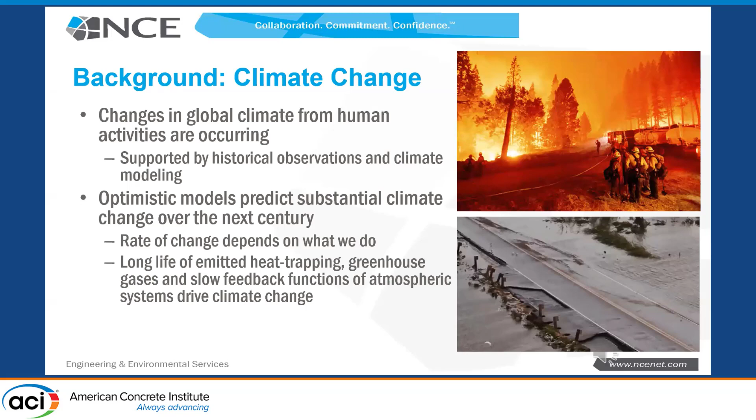Optimistic models predict substantial change over the next 80 years, and a lot of people focus on 2100 and the changes that will occur by then. You're probably aware that most associations and industries are embracing a goal: net zero by 2050. So the goal is to try to get this under control over the next 30 years, which is not a lot of time.

Predictions are that if today we somehow went net zero, we would actually mitigate this effect pretty quickly, and we would see it happening. If we track optimistically, you're going to see that kind of middle SSP 2 to 4.5 scenario. And if we just keep doing what we're doing, we're looking at a 4 to 5 degree increase in average temperatures annually in the world.

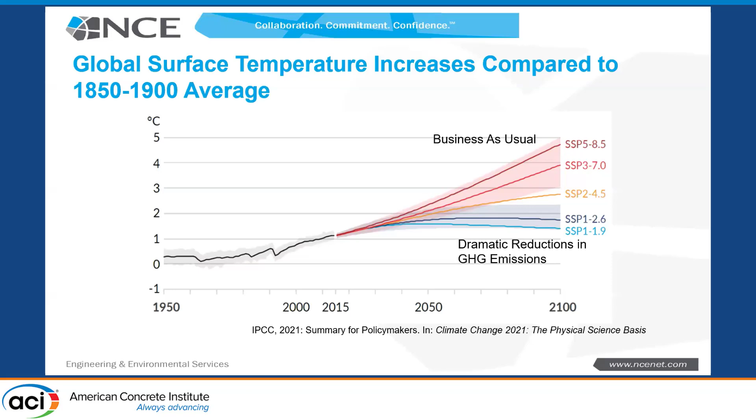This is significant. I live in the Upper Peninsula of Michigan - we're hoping for a little global warming up there, it was 10 degrees yesterday and snowing. But for the rest of you, especially Florida, where if the sea level goes up 3 feet, basically Orlando is almost becoming beachfront - and that's not a joke, that's actually true. It's going to be a serious problem.

This is why we're doing this - it's actually serious, and as an industry, as an association, we are embracing this. We talk about sustainability in general. I'm not going to have a lot of time to go through it, but the reason I put this up is I'm going to be focused on our concrete materials today. That's a small little piece of the puzzle.

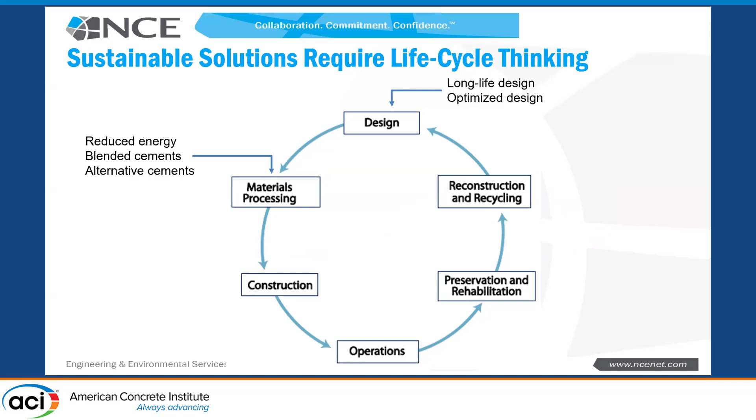We need to adopt life cycle thinking. We need to be thinking from the design phase, looking at optimized design, long life designs, how we're looking at our material processing - that's where I'll focus today - our construction process, efficiency, possibly calcium carbonate mineralization, and operations from a highway perspective, which is huge.

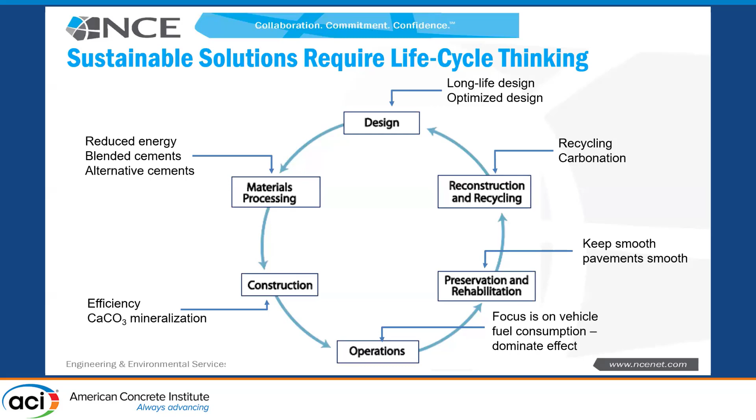Airports, not as much, but we definitely will want to think about how we're going to preserve things, keep them functional, deal with resiliency, and then in the end, the recycling of that material and then running it back through our new designs. So all of this is important.

The challenges in front of us, they're pretty great. And I will tell you, change is difficult, right, Tyler? People don't like to change, unless you're Tyler. Tyler likes to change every day, man. He's got energy. He embraces change.

But most people freak out about change. We have to start to embrace it a bit, understand this change is coming, educate ourselves, and look at what we've done traditionally. Our traditional cement and concrete are carbon intensive, and what we can do to fight the conservatism built within our current codes, specs, and standards that prohibit us from making the change we need to.

And I will tell you, we've made some good changes. I'm going to talk about things now, but the idea here is don't be sad. There's a lot of opportunity here to innovate, and we have a lot of help from people interested in helping us as a species change our behavior.

So why the focus on cement and concrete? I'm sure most of you have seen this. The reality is, for every man, woman, and child on this planet, we produce about 2.2 cubic yards of concrete per year. We love concrete. It's a wonderful material. Civilization as we know it is built with concrete, and that's not an exaggeration. You wouldn't have running water, you wouldn't know where it goes when you flush the toilet, buildings, everything.

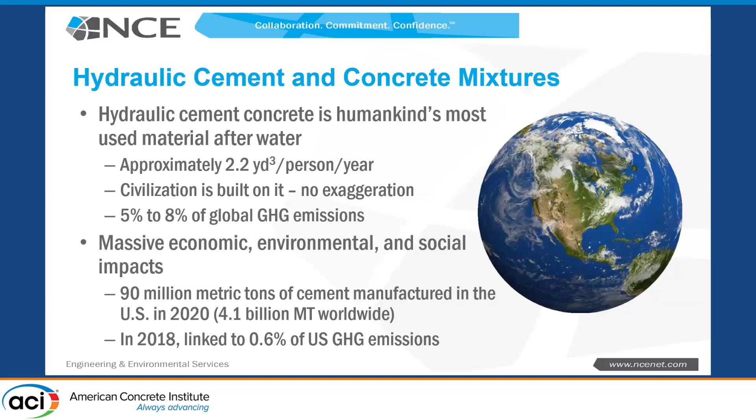Concrete's wonderful. But because it's used so much, and it's so robust and easy to use and forgiving, it's roughly responsible for 5 to 8% of the CO2, the greenhouse gases we generate in the world. The numbers in the US are smaller as a percent of our economy. We roughly manufacture 90 million metric tons of cement in the US in 2020, versus 4.1 billion metric tons manufactured worldwide. That's about 0.6, 0.7% of US greenhouse gases. So it's a smaller percentage, but that doesn't mean it's not significant, and that we're not the focal point of those who want to lower our carbon footprint.

Where's it coming from? If I look at concrete in a ready-mix truck at the gate, leaving the ready-mix facility: 1.5% of the CO2 in that 10 cubic yards of concrete is basically from acquiring and processing the raw materials to make that concrete. 89% is from making the Portland cement. 9.5% is wrapped up in actually making the concrete, the aggregates and whatnot.

Out of that 89% from manufacturing, 37% of all the CO2 involved in that concrete in the truck is from the fuel burning in that kiln. If you haven't seen a cement kiln and you have the opportunity, take it. It's an amazing thing, it'll scare the bejeebers out of you. The heat is incredible, right? Around 2,700 degrees Fahrenheit, I think. So it's hot. That's probably where Jimmy Hoffa ended up, in cement clinker.

46%, almost half of the CO2 in that truck, is from taking limestone, calcium carbonate, calcining it, and driving off CO2 — the chemical reactions necessary to create Portland cement. That's really tough to get away from. No matter what efficiency we bring into our whole system, that truth stands. So the net result is for about every pound of cement, kilogram, or metric ton we make in the US, roughly 0.922 pounds, kilograms, or metric tons of CO2 is generated. A little bit less than one.

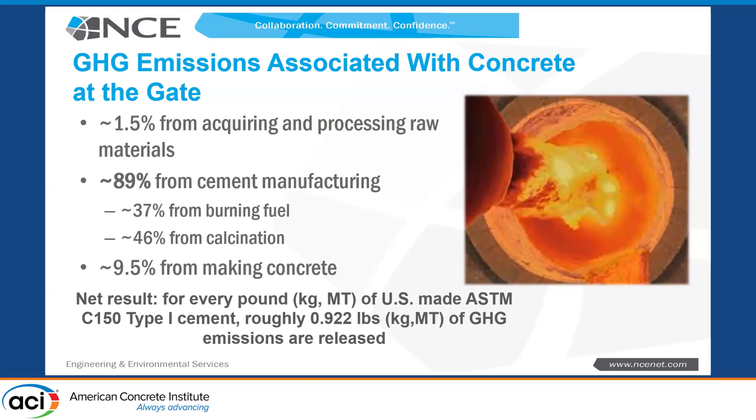When we look at typical concrete at the gate, the number is about 0.26 tons of CO2 per cubic yard. That's kind of an average number, it can be higher or lower. Roughly 0.23 tons of that is from the Portland cement in that concrete. So guess where the focal point is? If you're going to deal with this problem, what are you dealing with? Portland cement, right?

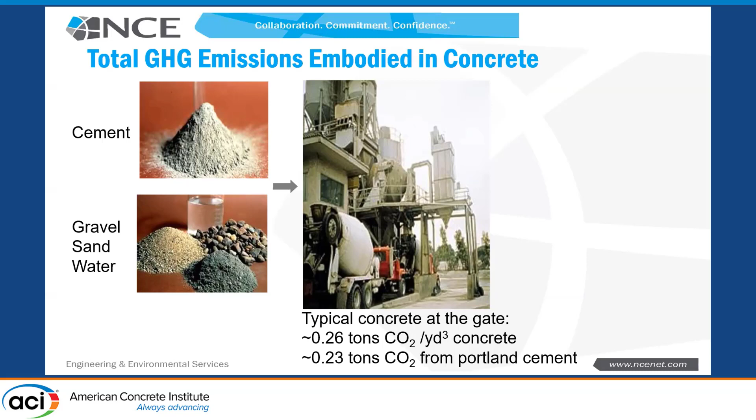And how many cement manufacturers do I have here? Are these numbers about right? Now, these are our numbers, and as a manufacturer, you know this is what you've got to do. So what are we going to do?

Net zero 2050. Again, the PCA is supporting this. There's a big commitment on the part of the Portland Cement Association. They have a really nice roadmap, you can read it. I'm not going to talk about a lot of it, but they go into clinker optimization and sequestration, optimizing the cements they're selling, optimizing concrete, and in-service end-of-life carbonation.

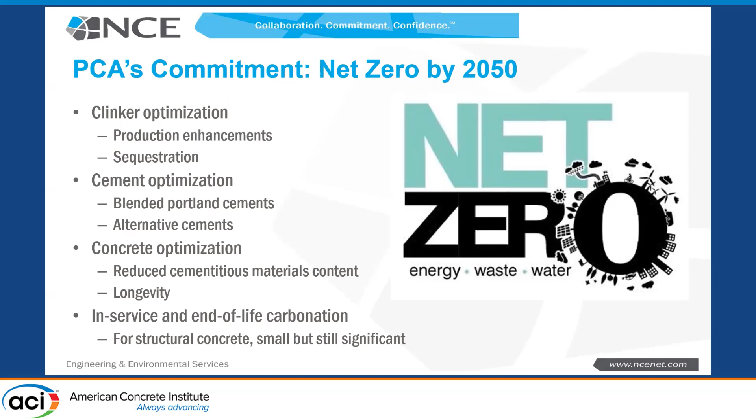I'm really going to drill down on two things right now, primarily due to time and the focal point of what we're dealing with here. And that is, what can we do right now, wherever you're sitting, when you're making any concrete, including concrete for airports? One, replace clinker with supplementary cementitious materials. That's the simplest thing, right?

So we have a 6-sack mix in our concrete, 564 pounds per cubic yard. We're going to replace 20% of that with fly ash. That's a big savings right there. We're going to maybe do 25% or 30%, or we're going to go further. We're going to go in and blend some limestone in there, right?

An ASTM C595 Type 1L. How many of you are seeing that in your markets right now? Pretty much all of you, right? That's been brewing for like 12, 13, 14 years in the States. Colorado's been using it since like 2008 in paving. And all of a sudden, within a year, everywhere we look, PLC.

That can have up to 15%. Really, it's usually 12, 13%. We take that and blend it with an SCM, and we get further reduction. And the chemistry here is such, and the particle packing is such, that with an SCM, with some aluminates, with that ground limestone, you get some benefit that's actually better than the SCM would do without the limestone.

So there's a lot of ongoing work right now. People are looking at even higher contents, up to 25%, not for paving. I wouldn't recommend that, but if I'm doing a masonry block or something of that type, it might be perfectly acceptable. And so from a cement manufacturer's perspective, they're under pressure to reduce their carbon footprint.

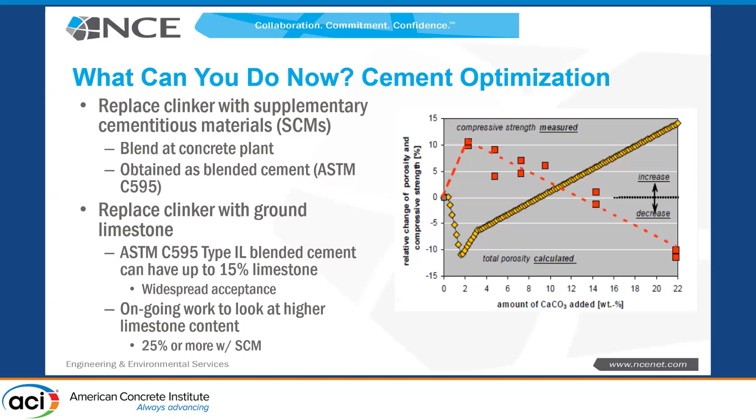They are going to want to provide blended product. And as things get more complicated, it's going to be important, because there's a lot of chemistry involved here that most of us as civil engineers hate. That's why we're civil engineers and not chemical engineers. But you got to balance things out, like your sulfates and all of this, for getting the right hydration mechanics. As things get more complicated, let them do it, because when it goes wrong, then you know who to sue. You sue them, not the ready-mix supplier who put the ash in.

Lots of good sessions already. We all know about fly ash. We all know there's shortages of fly ash, right? Why is there shortages of fly ash? Because we're trying to burn a little less coal. But there's lots of fly ash that's in landfills. So we're harvesting that. And a lot of good papers on commingled fly ash with bottom ash.

And now we talk about coal ash. Larry's back there. He's very active at ASTM, and they are working diligently to make sure that our specifications grow, not to provide limitations, so that we keep using quality SCMs, coal combustion products, in our concrete. So we want to make sure we have those. Slag cement can be used. Natural pozzolans are of immense interest. And in some places in the country, there's great supplies of these.

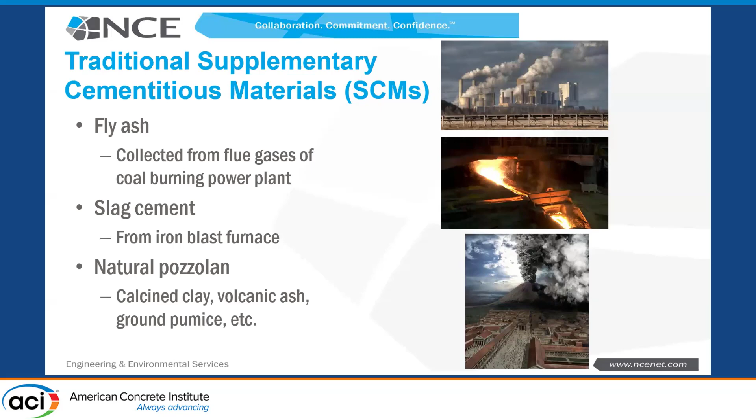Other places, cements are going to be manufactured with maybe 40% clinker, 50% clinker, a high percentage of limestone, with then calcined clay in a whole new system called LC3 or LC2. Again, this is later in life, like maybe next year. But it's important to recognize that we have solutions. These are different than what you are used to, but they are things that we will be doing, and you will develop knowledge on how to do it.

As I said, the real push is in this idea of using the blended cements, the 595s. They can be a 1P, which is a pozzolan, blended with pozzolan; a 1S, blended with slag cement; a 1L, which is blended with limestone; or a 1T, which is blended with two of those. It could be a limestone with a pozzolan, limestone with a slag, two pozzolans of that type. Typically just the 1L, depends on who you talk to, but it might reduce your carbon footprint 7 to 9%, 8 to 10%. So it's an immediate reduction. And it's designed to be fairly seamless.

And how many of you are like ready-mix producers or contractors? Anybody here? Have you worked with the 1Ls? How does it work for you, honestly?

And how has it been for you, man? I'm in stabilization, so we're not ready.

The idea is most contractors and ready mix suppliers will say there's a little fluctuation, but if I go from one type 1 to another type 1, I get the same kind of fluctuation. So the 1Ls are designed to be pretty easy and should integrate right into your system, and that's why the transition's underway.

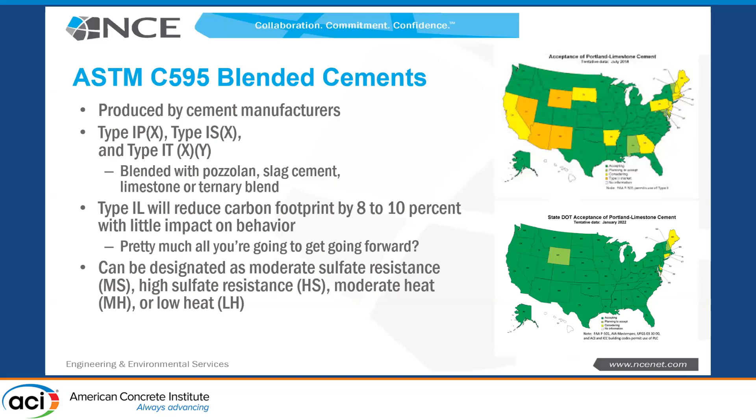All of these questions have been answered with sulfate resistance and heat. If you look at these two charts here, from 2018 to 2022, the amount of transition was so fast. No one saw that coming, that the transition to type 1Ls would be as quick as it's been. So this is a real success story and a map to help us move forward.

The second part of this is let's put less cement in our concrete. So less clinker in our cement, less cement in the concrete. Very easy to do. This is already completely allowable and encouraged within the P501 spec for airports.

This is Tyler's curve, or at least Tyler and company's. He's worked with a lot of people over the years to develop this, a lot of mixes. This is the curve that for airports might not work as well, from standing up the edges and getting some sloughing of the edges. So that's going to be investigated because Tyler just got a contract last week to deal with this.

I'm lucky enough to be on the team along with Dr. Smith over here. So we should have a good time.

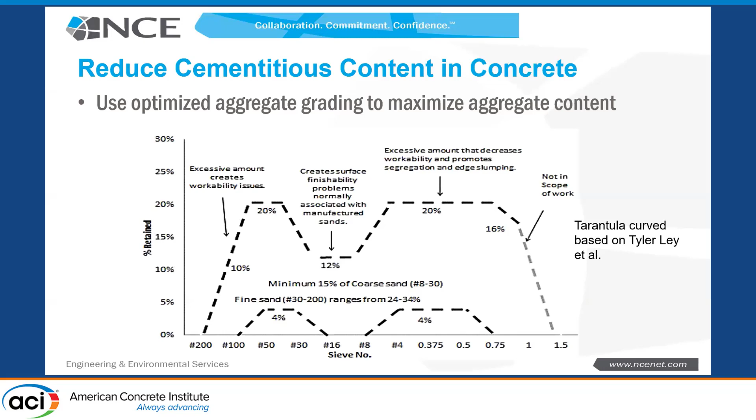But the bottom line here is there are tools available to take your aggregates, and if you're working with concrete, you should not be thinking of it as coarse and fine aggregate. You should be thinking of the blend of the aggregates, filling space with as much aggregate as we can and getting the workability we need, yet minimizing the need for paste. So when we approach it this way, we can reduce our paste quite a bit and fight a common fallacy.

And the fallacy is that somehow more cement, more cementitious materials equals more strength. That is not true. Now it can give you higher early strength because the heat of hydration will kick it off a little bit more, and that is of value in construction, right? If you're a contractor, you want to be able to strip forms often as early as you can, or when you're slipping a pavement, sometimes you want to use that for an access road.

But on airports, sometimes you're not under the same time constraints, so you have a little bit more time. The bottom line is this is some work that Peter did with one of his grad students that showed that at different days, once you get beyond a certain cement content, there's no change.

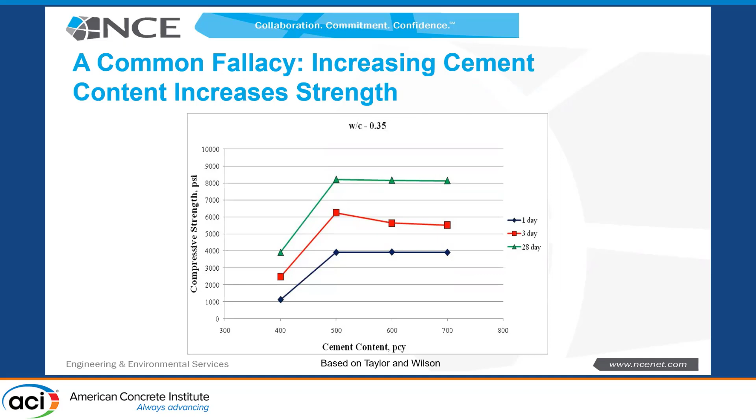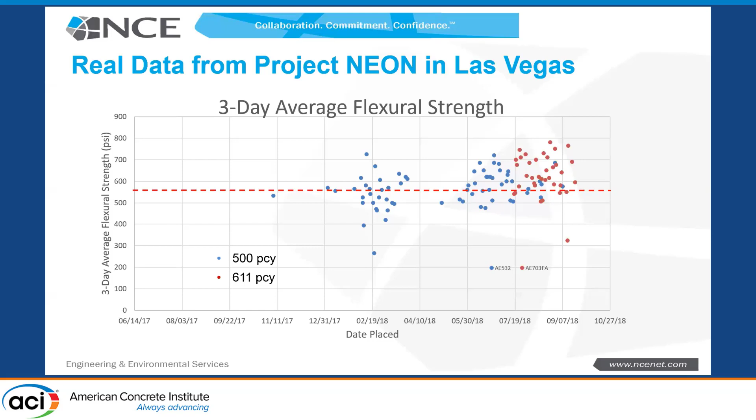We switched as we got into summer because this was 100% manufactured sand, and that mix started under the heat with a little bit of moisture control issues, I'll say, with the ready mix supplier. They were getting a little stiffening of the mix, so then the only other mix they had approved was the 611. But if you look at this data, even at 3 days, there's not a lot of difference, factoring in that this was February, which even in Vegas is cold compared to later. If you look at the 28-day averages, we actually had, on average, higher strengths with 500 pounds per cubic yard than with the 611.

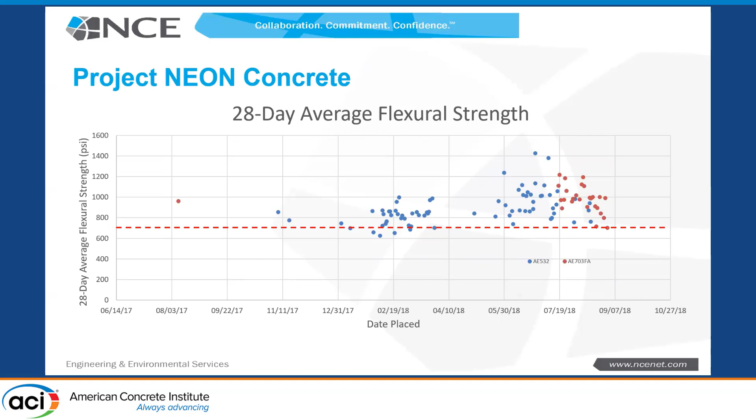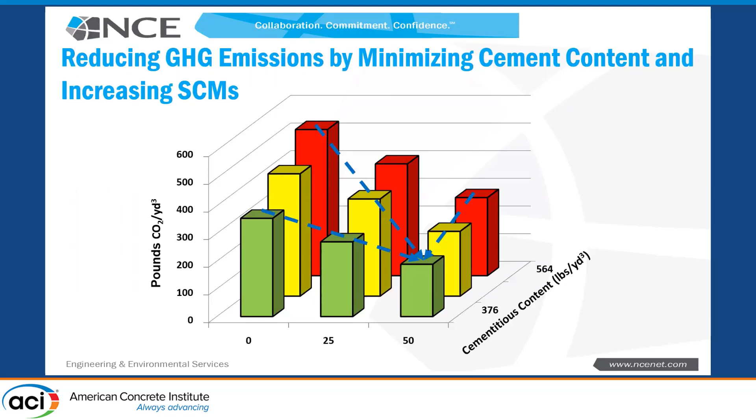So this can be done and it should be done, especially on airfields. The general trend here is basically go away from your pure Portland mixes, reduce your cement contents, and at the same time try to replace clinker with SCMs.

If you look at the current P501, it actually allows you to do a lot of things. It does not allow 1Ts, but it does allow all of the other blended cements, including 1Ls. The military does not allow 1L at this point, I don't believe - that's what Peter was talking about. They're the ones still having heartburn, the last ones.

Basically, they have their fly ash specs, but they encourage the use of fly ash from 20 to 30% replacement, unless used with slag cement, then 10% max. You can use up to 55% slag cement.

And they allow you to go as low as 470 pounds per cubic yard, unless in a freeze area where they say 517, but they'll let you go lower if you petition them.

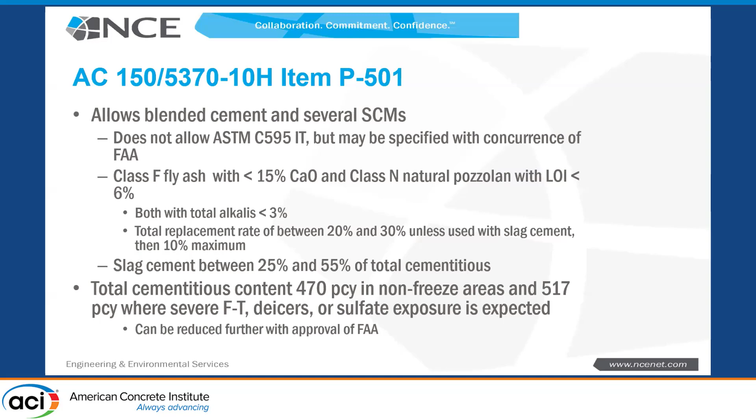I thought I added it, I don't see it here, but one limitation is they don't allow you to use superplasticizer. So for some reason, FAA does not allow the use of a type F.

So I'm going to try to finish quickly. I'm watching my time here. I think I'm okay, I got 3 minutes left and then 5 minutes for questions. Because 5 minutes is not enough, but questions are good, so keep that in mind.

Assessing what we do is critical to moving forward in the right direction, because there are pressures for all kinds of easy levers to pull. So what we want to do is avoid those easy things, and track ourselves.

And the best way to ultimately do it is going to be using EPDs that are based on life cycle assessment done according to standards. I don't have a lot of time to cover this, but I want to mention it because this is where the industry is going. If you have not been asked to this point to provide an EPD for your concrete, you will be, and that's not that far in the future.

There is a document produced through the Sustainable Pavements Program that was led by Dr. Smith here. I don't think either one of us worked on this document much - you probably did, but I didn't. But this is a good document, it's from the Federal Highways. You can download it, gives you some good background.

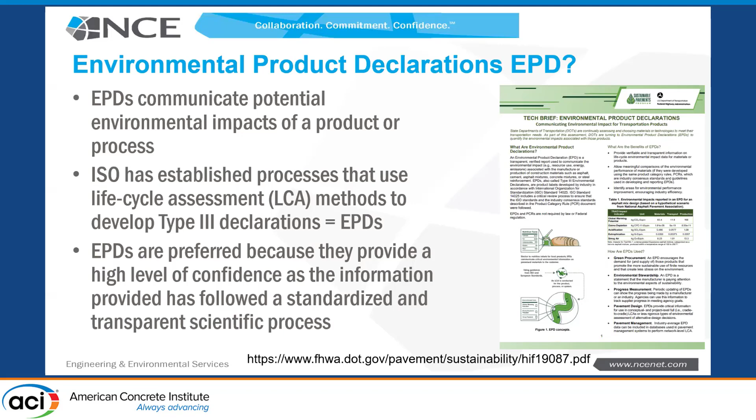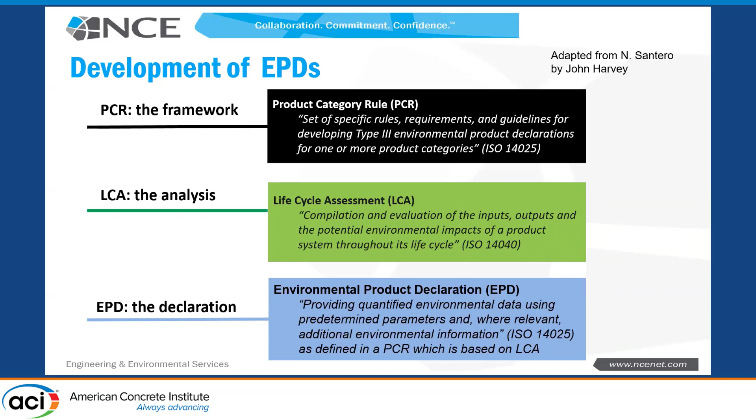Basically, these will communicate the potential. This is creating more or less a nutrition label over multiple environmental impact categories for your product. In the end, you start with a set of product category rules developed through a very rigorous, open process. From those rules, once established, you can analyze your concrete product, and from that, generate an EPD that gets filed with somebody like ASTM, and then it's available to show where you're at. As you make changes, you can show improvement.

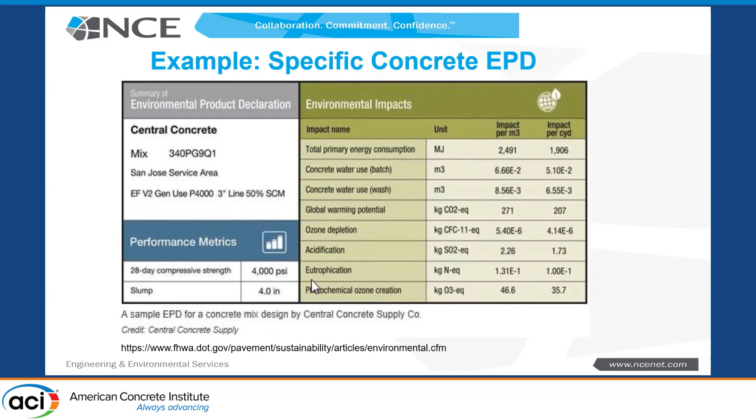And it looks something like this - this is a real EPD from Central Concrete in San Jose, California. Many ready-mix producers are now producing these, and you can get this information and track your decisions and how they are affecting your greenhouse gases.

Last thing I'm going to talk about is some work I'm involved with Larry on right now at MnROAD. It's not an airport project again, but we're actually designing right now a test site with 16 test cells that are going to look at various carbon reduction strategies. We're going to have a control section, and we're going to let Dr. Taylor here optimize a concrete mix to reduce it from their standard 6-sack mix down to whatever he can pull out of his lab. There's going to be 3 carbon mineralization sites.

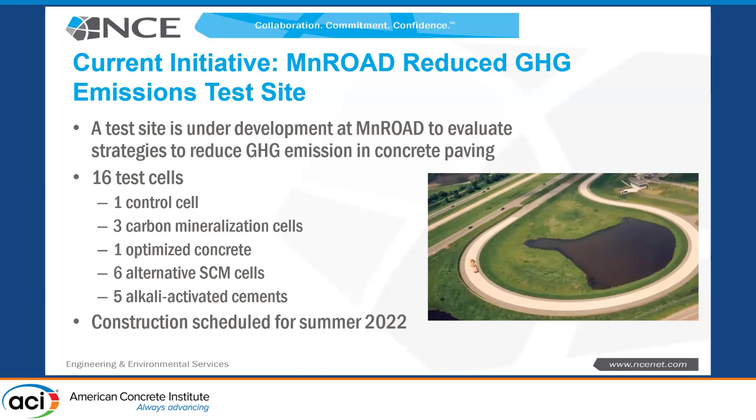And then there's going to be, we don't really know the combination yet, but alternative SCMs and alternative cementitious systems, alkali activated systems. We're hoping to get some geopolymers in there, but they all seem like they don't want to go through a ready mix plant and get paved with a paver at this point. You know, that's the deal - it has to go through a standard ready mix plant and get placed with a paver. So that work is going on, and we'll be able to talk about that more in the future.

I think the bottom line is, yes, we are entering a challenging time. It's going to be an interesting time. I've used 25 minutes, that's not bad. The main thing I'd want you to walk away with is don't be depressed about it. We have a bright future, and don't let all the acronym soup of developing an EPD scare you to death. Figure out how to do it and use these to avoid greenwashing, because greenwashing is what could really do us a lot of harm - eventually we're going to find out we've been wasting our time and feel pretty ripped off. So I think we've got a bright future.